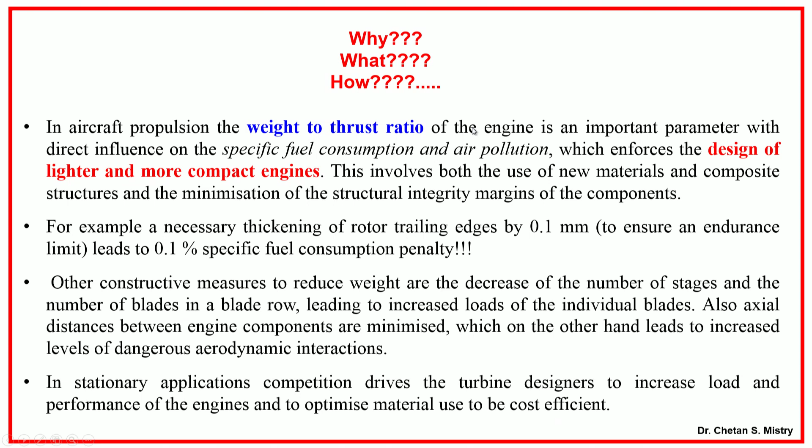When we talk about applications for land-based power plants, our major concern is specific fuel consumption, and that's the reason for the load constraints. Here we also have constraints with cost, which is why people are putting more effort towards the development of new engines.

Now the lifetime of the engine components is a major factor in terms of maintenance, operation and services. For that, cost is a major criteria. By reducing maintenance efforts, we need to stay competitive in the gas turbine engine world. Now if we look at it, we have specific designs.

It is not like the compressor or turbine we have designed for one engine can be used for another engine - it is not like that. So specifically we need to do a lot of research and development activities for developing these engines, and that's why we need a lot of experimental data along with us.

So overall, for the development and validation of numerical tools for structural and aerodynamic calculations, we are totally relying on semi-empirical relations.

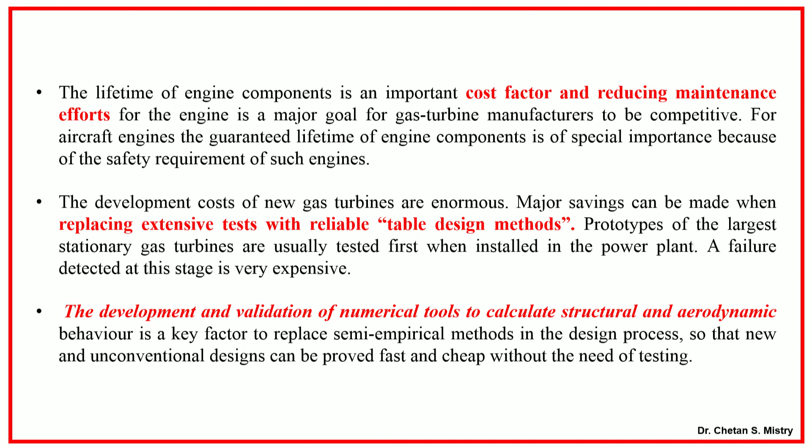Yesterday, in terms of aeroelasticity, Professor Maiti gave some highlights on that. Now the time has come where people are looking for designs that need to be done faster and at a cheaper rate, and that's what has motivated this kind of study, especially when we talk in terms of unsteady aerodynamics for turbomachinery.

Yesterday Professor Maiti discussed Collar's triangle, which comprises mainly three forces: inertia force, aerodynamic force and elastic force, and he gave some glimpse of that.

Now today, after completing this course, all participants should know the basics of the compressor that are applicable. Many of the students and participants don't have exposure to turbomachinery, and that's the reason I am starting with some fundamental parts so that they can understand easily.

Slowly we will be moving towards the complexity in terms of three-dimensional flow field. Then we will discuss operational instability in terms of stall and surge, and flow instability that happens because of inflow distortion. Overall, this will provide us a platform for understanding unsteady aerodynamics, which will be discussed in detail by Professor Watanabe from tomorrow onwards.

So if we look at the trends for compression ratio, during the 30s and 40s, the compression ratio required was in the range of 3 to 6.

Slowly that has increased, and now people started talking in terms of compression ratio of 30 to 40, and that's what is putting a lot of challenge for the designers who are designing the axial flow compressor.

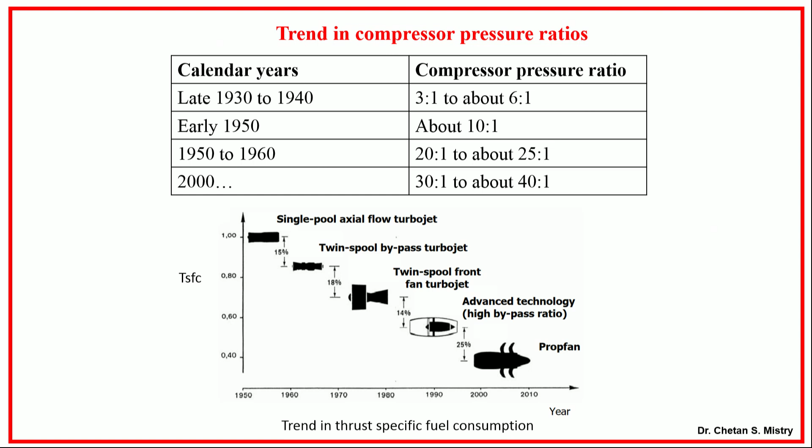Space and weight are not a criteria or constraint for our land based power plant, and that's the reason why the blading may be somewhat different. If we talk in terms of their design, that's different. In terms of manufacturing process, that's different. In terms of number of stages, those are different. So that's the reason why we need to talk overall in terms of gas turbine engines.

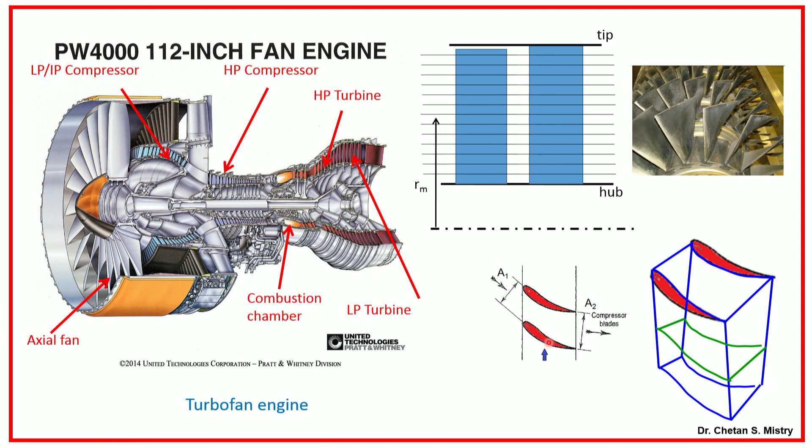Now if we look at this, this is a schematic for a multi-stage axial flow compressor. It is comprising, as I discussed, a rotor and stator combination. This rotor-stator combination, in conventional terms, is known as a stage.

Here this is known as the inlet guide vane. Now for the inlet guide vane, there are different approaches across the world. In European designs, they generally avoid having inlet guide vanes. In American designs, they prefer to have inlet guide vanes. They have different design philosophies.

Now the purpose of providing the inlet guide vane is to guide the flow towards the rotor. The purpose of the stator is to guide the flow to the next coming rotor. Now what the rotor does, as we discussed, is provide a diffusing passage. So the rotor diffuses my flow, and from there the flow comes out and strikes the stator.

That stator will guide the flow for the next rotor up to a certain aspect. I say this is applicable; later on you will realize the stator also has to do diffusion work.

Now let's try to understand a very important part when we are talking in terms of turbomachinery: the velocity triangle. The understanding of this velocity triangle is always very important. If we look here, this is my stator and this is my rotor, and this rotor is rotating from the suction side towards the pressure side.

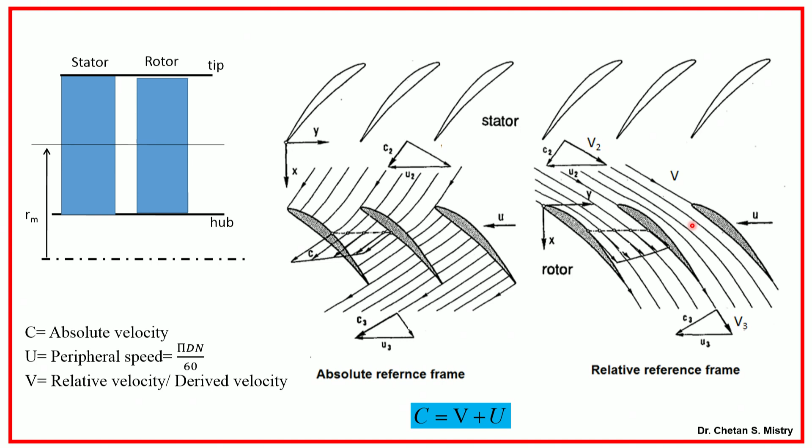Now, if we look at this blade, as I discussed, for that blade at midsection, let me put my velocity triangle. This is my velocity triangle if I consider my flow entering axially. This is my rotational speed for the rotor, and this is my relative velocity. This beta 1 is known as my blade angle.

Now, my flow coming out with relative velocity V2, with reference to my axial direction, I have my exit flow angle, that is beta 2. If I add my rotational or peripheral speed, that gives my absolute velocity component, C2. This C2 will strike my stator and come out axially. So, this is how my velocity triangle works.

This is very important when we talk about performance and understanding instability in axial flow compressors. So you need to remember this velocity triangle. If you look at the passage here, for the rotor, my inlet area is lower and my outlet area is larger. Similarly, for the stator, same is the situation.

Now, as I told, my blade is comprising of a number of aerofoils. So at each aerofoil you will have variation. Why is it having variation? Because if I define my peripheral speed as pi d n by 60, as my diameter or radius increases, my peripheral speed increases, and accordingly my blade angles will be changing, both for rotor and stator.

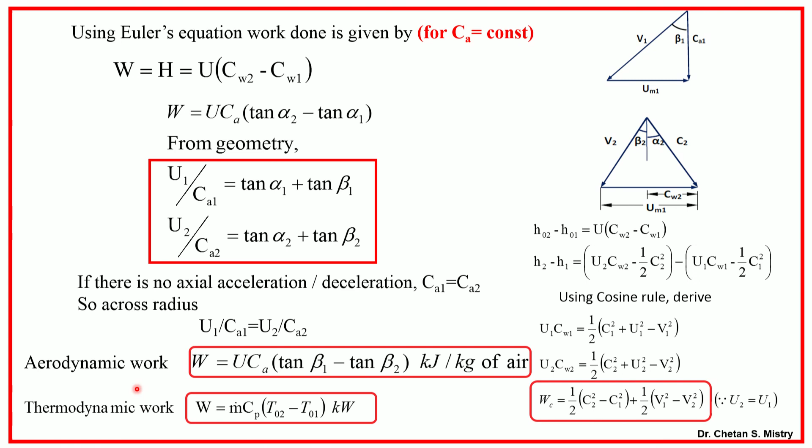Now, if I represent my work done in terms of my pressure ratio, then that is given by the pressure ratio as a function of my efficiency, my total temperature rise, and inlet temperature.

Now, the question is, as we have discussed, we are talking about recent designs where we expect our compressor, rotor, or stator stage to produce a larger amount of work. Why? We want to have a smaller number of stages, low number of stages, because we are looking for compact design. At the same time, when I decrease the number of stages, I decrease my weight of stator and rotor, meaning overall penalty in terms of drag decreases.

Now, if we want to increase this pressure rise, based on this fundamental equation, you can understand I need to increase my delta T0. This delta T0 can be increased by increasing the rotational speed U. If I increase my rotational speed, you will understand my flow will become supersonic at a particular region, and that is where I will have a problem, in terms of a structural problem.

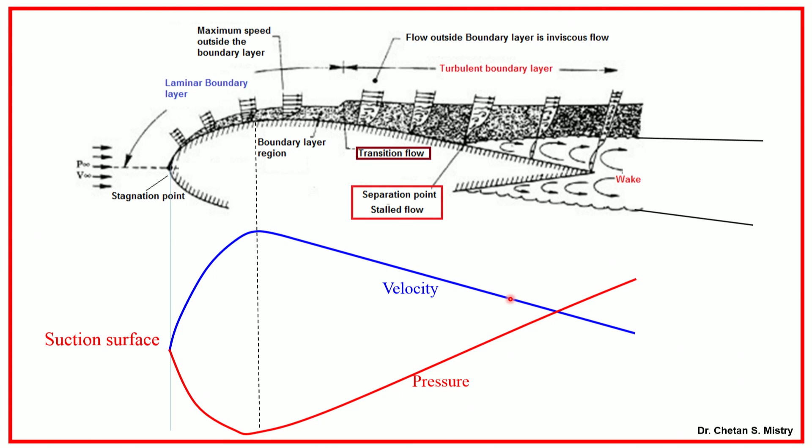This is showing the distribution of inlet pressure and outlet pressure on the blade. Later on we will discuss what is happening.

There are different types of aerofoils, as we have discussed. If we put a flat plate and give it curvature, that will also give a rise of pressure, but that pressure rise is not as per our requirement. In that case, we need to take the benefit of the aerofoil shape.

If you look at these aerofoils, they are subsonic aerofoils - we have NACA 65, and we have the C4 aerofoil, known as the British aerofoil. Most low speed application designs are made using these aerofoils. If you look at this blade, the aerofoil we are talking of is the C4 aerofoil.

Similarly, this is my next blade. If you compare these two blades, this blade is thicker and this blade is thinner. Very soon you will understand the reason behind it. This blade is a transonic blade.

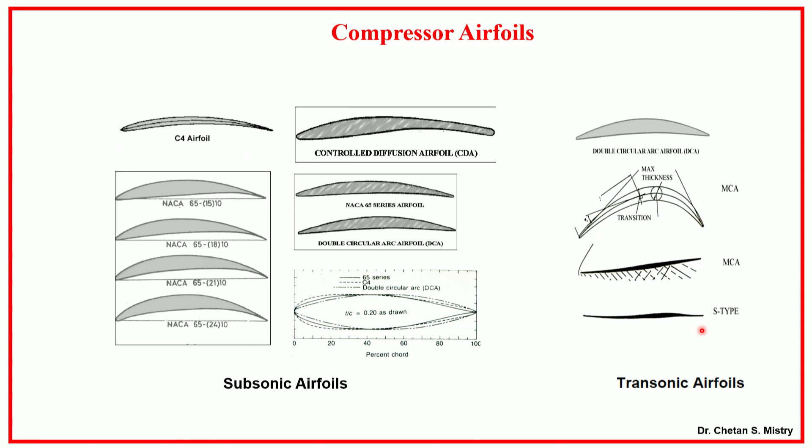For the transonic blade, this is my case here. This has been specially made, known as double circular arc, multiple circular arc, and maybe S type blade. So over the years, as per requirement, people have modified the shape and are using this kind of aerofoil for transonic rotors.

Now let us try to understand - once you understand this part, half the work is done in terms of understanding your compressor. If you look at my flow, it is entering from the upside. Here I have my leading edge, this is my trailing edge. As discussed, the lower part is known as the pressure surface, and the upper part is known as the suction surface.

Now what happens when my flow is entering - this is represented in terms of velocity, with acceleration of flow, and then because of the curvature of the blade, the flow gets decelerated smoothly. Similarly, near the pressure surface, in a small region I get acceleration of flow, and then the flow gets decelerated - this is how the velocity distribution will be. Conventionally, for turbomachinery, people define their performance in terms of Cp.

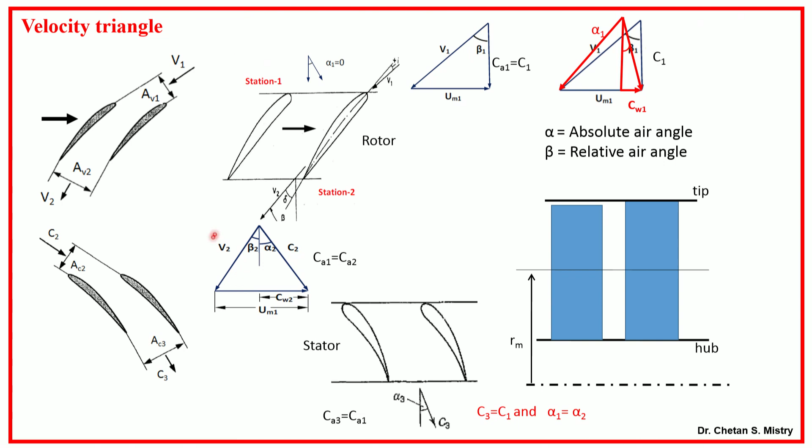What they say is they have the maximum acceleration possible, defined as V maximum. My inlet velocity is V1 and my outlet velocity is V2. Let me discuss this in terms of my velocity triangle. Here, this is my inlet velocity and this is my outlet velocity - I am talking about the relative velocity. If you look carefully, their magnitudes are different. At the exit, my relative velocity will be lower.

Now this diffusion factor incorporates solidity, which is known as chord by pitch. Pitch in the sense of the distance between two successive blades. So here, between this point and this point, that is what we are defining as pitch, which depends on my number of blades. You can look at 2 pi r by z, and secondly that is what we are talking about in terms of chord.

Now the situation is, as I told you, I need to have higher diffusion, so you need to play with these parameters. Suppose if my hub diameter is smaller and my tip diameter is larger, if I want to accommodate my blade, I can have less number of blades to accommodate. Why? Because my hub has a constraint - I cannot accommodate more blades. Now, suppose my hub diameter is comparatively larger, what will happen? I need to have more number of blades. So you observe a similar situation in the engine.

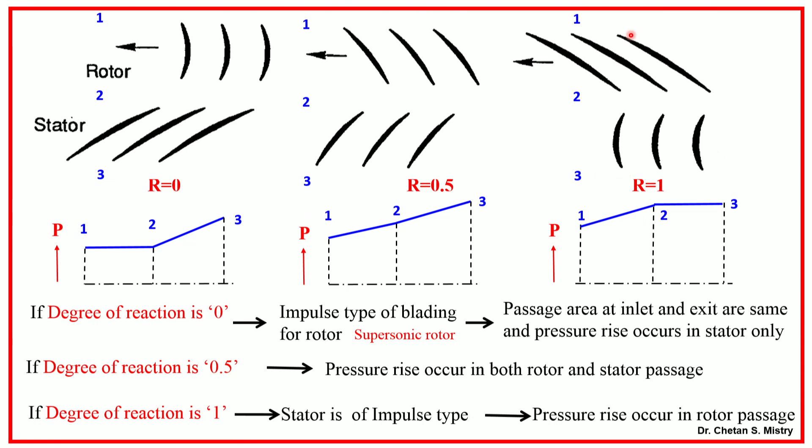Here your delta beta, and if you look at this as an overall one blade, that delta beta is different. Now if you look at this, this is a blade - that is your tandem configuration.

What is happening - if you look at this as a single blade, this is single, here this is my single blade, this is also single blade, but the thing is we are having tandem configuration. What it means is, if you look at the curvature of my blade, that is larger, and that is required to achieve more pressure rise.

Now the reason this is interesting is in terms of having configuration for more pressure rise. What concept people talk about in this tandem configuration is, suppose if I have a larger curvature, there are more chances for my flow to get separated from the suction surface. Since we are having an additional blade placed below this...

What exactly it is doing - because of the gap between these two blades, my flow will get energy from this particular region. This leading edge is accelerating my flow, giving more momentum to my flow, and that is how I can delay my flow separation on my blade.

By doing so, now what is happening - I need to enter my flow to the next stage in axial direction, so I will be having my stator configuration of impulse type. And here, this much amount of length we can save. Roughly people talk in terms of 30% reduction in the length of my engine.

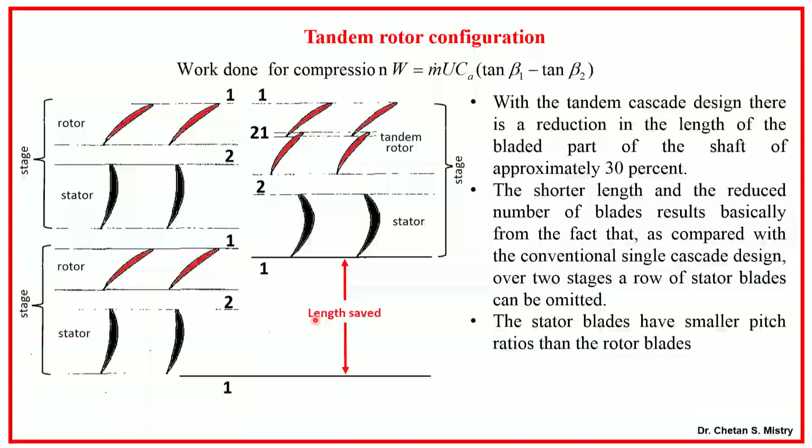Now when we say 30% reduction in length, that means it's the length of my stage and the length of my shaft on which I will be putting my rotor. So if we look at that shaft, suppose it is a solid shaft, considerable amount of weight can be reduced by incorporating this. So here we are having the reduction - overall reduction in weight as well as overall reduction in size.

Now near the tip region, we know we need to provide a certain amount of clearance between the casing and the rotor. When we provide this clearance, what happens? My flow always has a tendency to move from the high pressure side to the low pressure side. So this is how my flow jumps.

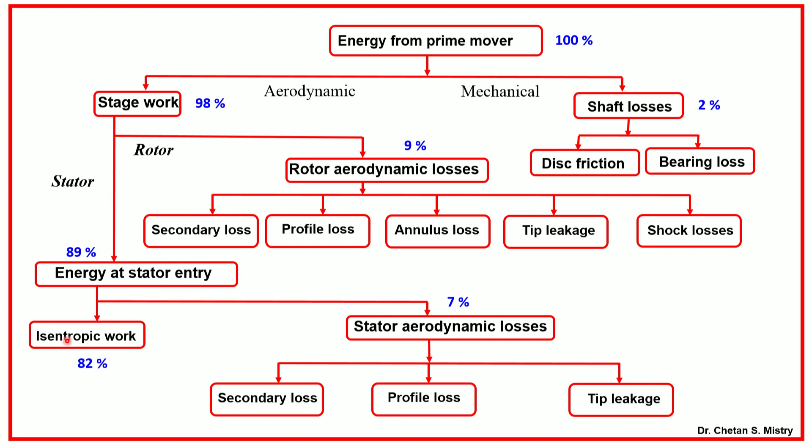Now this is what we will be discussing in detail, various losses, because that is what is creating trouble in terms of flow unsteadiness. Once you understand these fundamentals, it will give you very good understanding in terms of unsteadiness, that is what is being caused in my compressor.

It includes end wall losses, profile losses, tip clearance loss, secondary loss, shock loss, and shock boundary layer interaction. When we talk about boundary layer, we know we are working under adverse pressure gradient, so my flow will not have the energy to sustain or stay along the blade surface. After some point, it will lose momentum and you will have separation of the flow. Similarly, in terms of solid body, we will have growth of boundary layer.

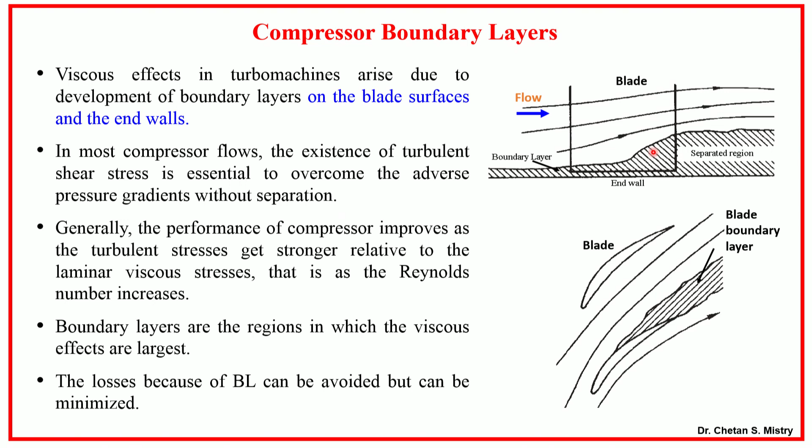This is what is creating trouble in terms of my flow physics. Later on, this boundary layer loss will merge with my other losses, and that is what is creating more trouble.

Suppose you consider the cambered case. When I say my angle, that is a constraint. My delta beta, that is my blade turning angle, is in the range of about 30 to 40, 45 degrees. If it is larger than that, you have chances for flow separation.

If you look here, this represents my low cambered aerofoil and this represents my high cambered aerofoil. If I have a high cambered aerofoil, I will have a thicker aerofoil, which will be subjected to higher losses.

In this region we will be having a thicker wake coming out. If I am talking in terms of low cambered and thin aerofoil, you will have lower losses, but at the same time the working capacity or pressurizing capacity is lower.

This again depends on so many flow parameters, like Reynolds number, Mach number, longitudinal curvature of my blade, inflow turbulence, free stream unsteadiness, unsteady boundary layer, pressure gradient, shock strength - so many flow parameters that are changing my flow behavior over the suction surface.

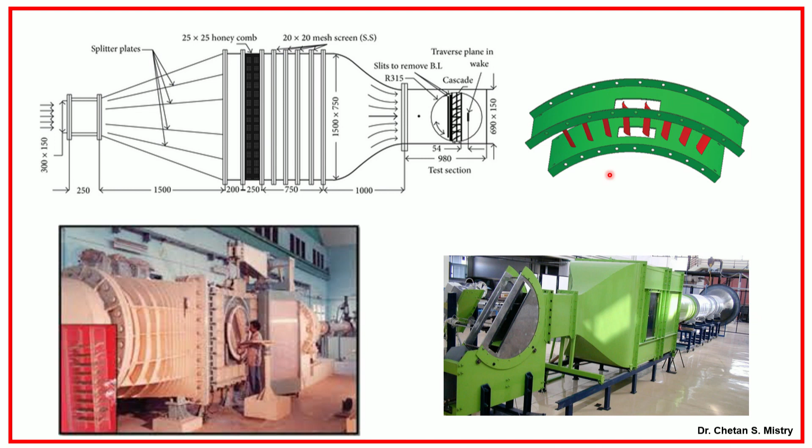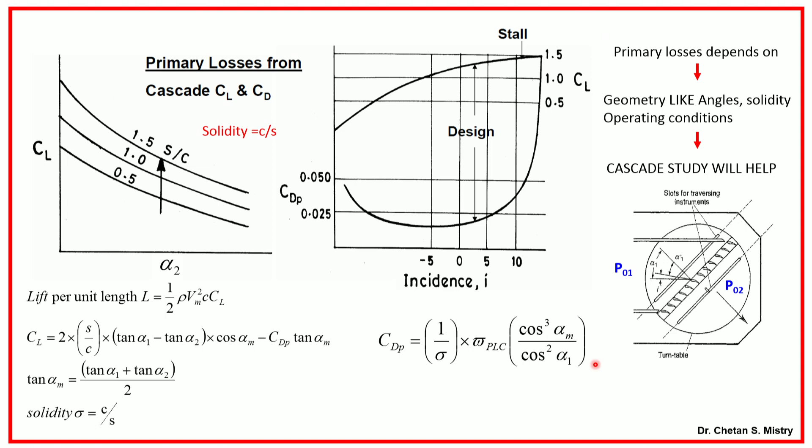Now the situation is what we are talking in terms of mixing losses. The name itself says it is because of mixing of my wake flow with downstream or freestream flow. That is what is happening between the gap of rotor and stator. That means the whole physics depends on what needs to be the axial gap between rotor and stator. Let me explain what will happen.

Suppose if I put my axial spacing to be larger, the size of the stage or overall stage length of my compressor will be increasing. Now when I am decreasing my axial spacing, I can reduce the size or length of my compressor stage. But since we are having less spacing between rotor and stator, flow unsteadiness or flow three-dimensionality will be greater in that particular region, and that will lead to losses and unsteadiness in the flow.

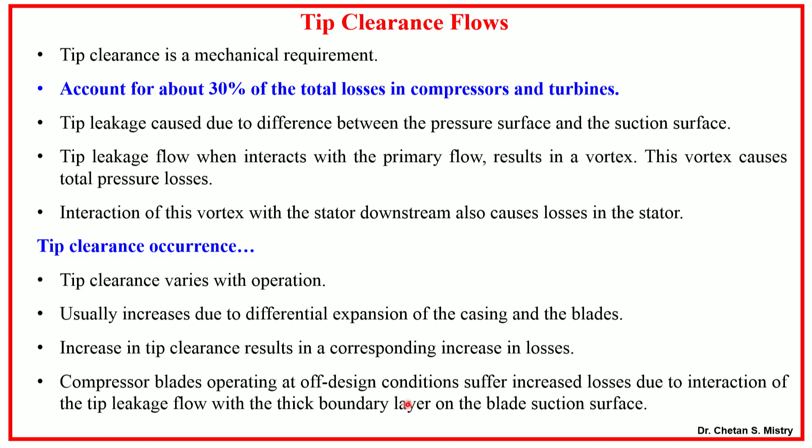Now the situation is, when it is working under off-design condition, I will be having more interaction with thick boundary layer condition, and that is changing my performance. Now let us try to understand this situation.

Here, this is my incoming flow that is entering. Now we will be having my flow moving from the pressure side to the suction side. What it will do when moving from pressure side to suction side is deflect my main flow. That means in this particular region we are having a low velocity region or flow deficit region. That is acting like my flow blockage.

Now here, this particular region is acting like a flow blockage. In that region we have seen our axial velocity seems to be lower. Now what is happening? The interaction between stator and rotor near the tip region, because of this flow blockage, the flow that needs to go towards my stator will not go. That means my stator will be working under off-design condition. Or I need to design my stator in such a way that it will take care of this.

Now this is what has been defined by Professor Tan from MIT. What they say is how my tip leakage flow is behaving. We have discussed there is a flow moving from pressure side to suction side, merging with my incoming flow, crossing through this passage, and striking on my pressure surface of the next coming blade.

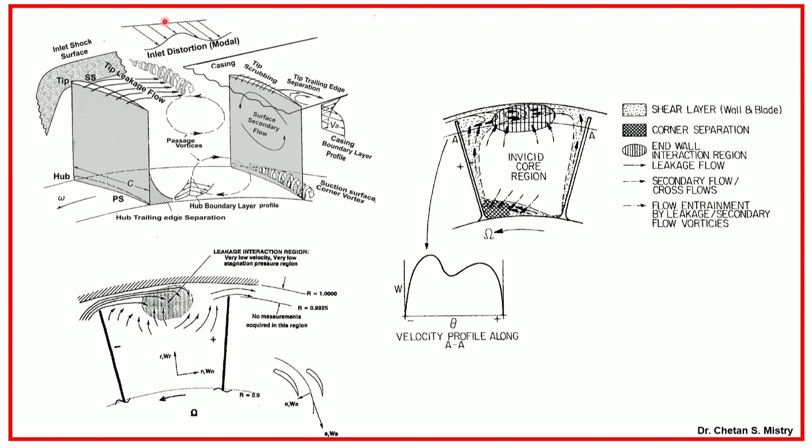This is what we call inlet distortion, which we will discuss when I talk about flow instabilities.

Now, this is what I was talking about in terms of changing your tip clearance. This is my design condition, with a certain amount of tip clearance. Now, because of some reason, manufacturing difficulty, tolerance in rotor design, or fabrication error, in some region some of the blades will have radial movement like this.

What will it do? It will touch my casing. Similarly, maybe because of manufacturing error or movement, the gap will increase. Now, when we talk about flow instability, flutter, unsteadiness, this gap plays an important role. You will have catastrophic failure of the whole compressor, or complete damage to the engine. So this is one of the reasons why people emphasize having a thorough understanding of flow physics.

Now, this is what we are talking about in terms of secondary flow. As I discussed, suppose I am looking from the trailing edge side. This is my pressure side and suction side. We will have the jump of flow from pressure side to suction side.

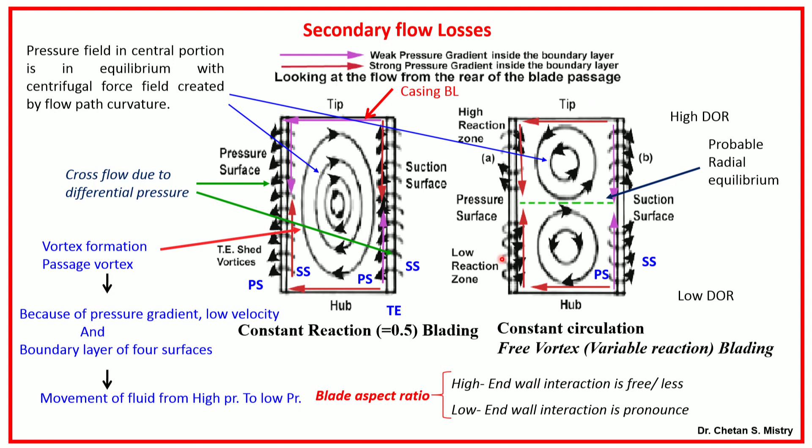Now let us move towards the Mach number and the shock losses. What we have understood is that my static pressure rise in the compressor will be increasing with increase in Mach number. My pressure gradient will be increasing with the Mach number. Similarly, we will be having momentum thickness, that is what is growing with the Mach number.

Let us try to understand. Suppose this is the flow between my flow passage between 2 blades. If you look at this, this is my performance map at different points. Say this end, that is my design point; A point, that is my stall point, I will discuss very soon; B and C point, those are my operating points.

So if you look at here, when I am talking in terms of point A, what is my point A? That is my stall point. Now let us try to understand. Earlier, during the 60s and 70s, when people were doing design, they found that with increasing rotational speed, my flow was becoming transonic. And that is the reason why they used to say avoid that kind of situation.

Slowly people have understood, rather than taking that as a loss, let us try to understand it another way. Suppose if I am talking here, this is my shock that will be attached to my blade, and the other end of my shock will be striking on the suction surface of my next coming blade. That is what is acting like a normal shock. The property of my normal shock is to give the pressure rise.

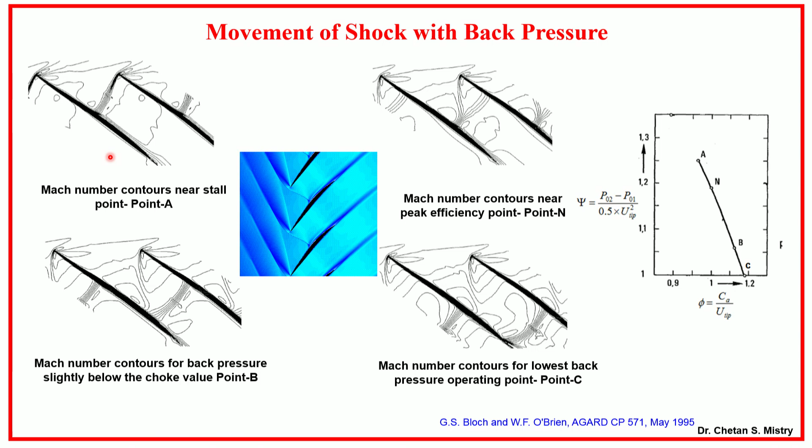So if you look here in terms of aerofoil, that is not the conventional aerofoil we are talking of. They are of some special shape. Suppose if I am talking in terms of point N, the shock is moving downside. Similarly, if I am talking in terms of B, that is moving downside. So the thing is, maximum pressure rise, maximum diffusion you are getting when you are at point A, and that is this situation. So you are taking the benefit of your normal shock.

Now the thing is, this is what we have discussed in terms of three dimensionality. Now let me discuss in terms of your inlet shock, that is what is entering inside my flow. Now what is our understanding? That shock will be acting like a blockage of my flow, and downside of my shock, I will be having a steep pressure rise. Now when I will be having very high pressure rise, and that too in a diverging passage, then there are more chances for my flow to get separated.

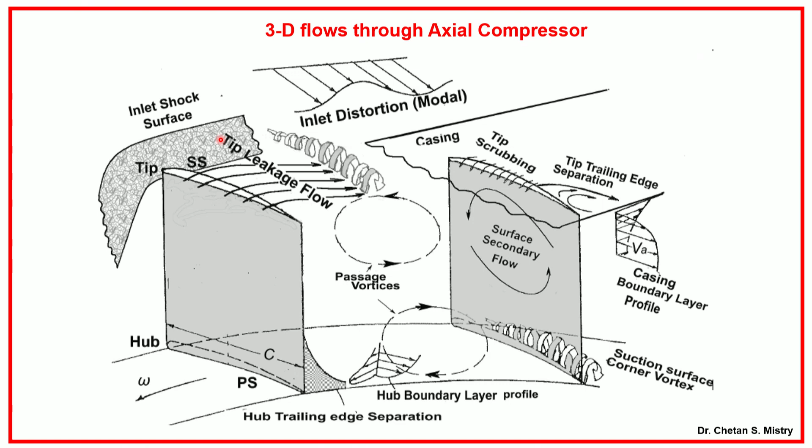So in terms of turbomachinery, the most complex fluid flow is encountered. What are they? They are basically secondary flow because of viscous effect and complex geometry, which is dominated by passage vortex, corner vortex, trailing vortex, horseshoe vortex, scraping vortex, etc. The inherent unsteadiness is because of relative motion between your rotor and stator.

Now, the flow pattern near the wall region, we will be discussing soon, that is in terms of laminar flow, turbulent flow and transition flow. Your flow may be subsonic, supersonic, or transonic, and due to the limitation of space, if we are talking in terms of military engines, space and weight both are constraints. So I cannot put a larger space between rotor and stator. There you will be having a very small gap between rotor and stator, and that is what is creating the whole trouble in terms of my flow unsteadiness.

Now let's try to understand in terms of incidence angle. Suppose this is my situation, this is my velocity triangle. This will create the platform for the next stage. Let's understand this is my design condition for a particular aerofoil.

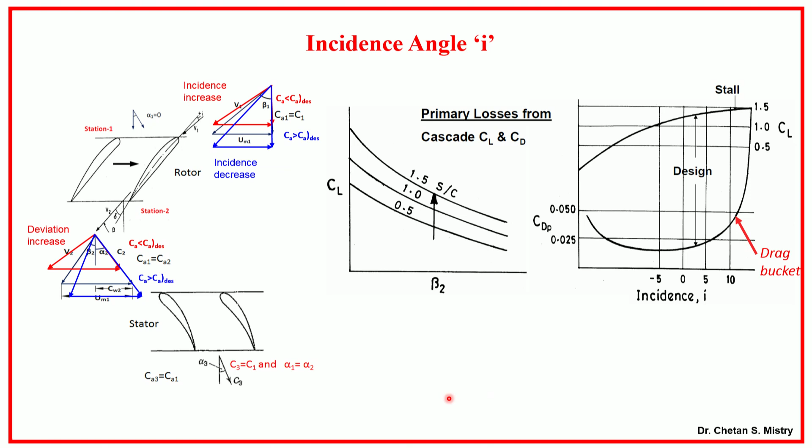Now let's understand in another sense, as we discussed the Cp distribution, which is very important for us. This is my design incidence condition. I will have a distribution of pressure or distribution of Mach number, here defined in terms of Mach number. Upper surface represents my suction surface, lower surface represents my pressure surface.

Suppose my incidence angle is greater than my design condition of zero. Here, I will have very high acceleration of flow followed by deceleration of flow. At the same time, on my pressure surface, I will have small acceleration of flow and then deceleration. If you compare the Cp here, it is clear we get higher Cp.

Now if we consider the other case, where my incidence angle is less than zero, what happens? I will have crossing of flow, meaning acceleration of flow on both the suction side and the pressure side. This in turn decreases my pressurizing capacity.

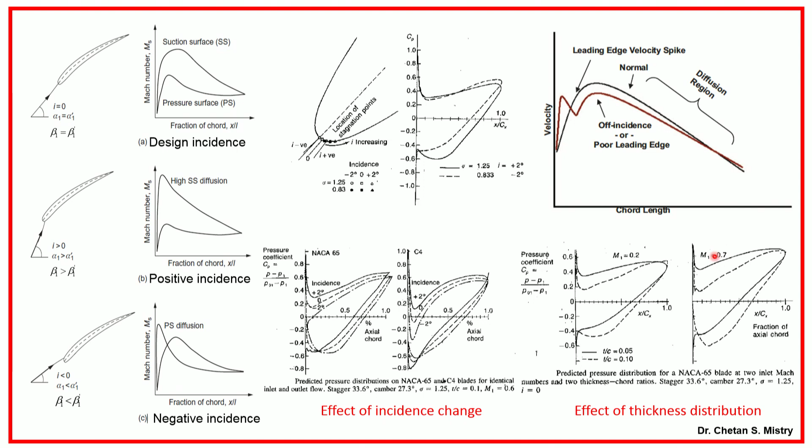For both cases, when I am changing the inlet Mach number to be larger, I will be having a larger Cp. So this is what we have discussed.

Now the question will come: sir, how do we decide the number of blades? Conventionally over the years, people have defined that you need an even number of stators and a prime number of rotor blades, that was the logic, and if you open old engines, that is the kind of configuration they have. Now people have understood the importance of selection of number of blades. If you look at high bypass ratio fans, they are selecting an even number of blades. The reason is it is easy to replace the blade, and the balancing effort needed also reduces.

Now, the flow unsteadiness we are talking of is also happening because of the selection of the number of blades. So that is also one of the criteria, or one of the reasons, why selection of the number of blades is very important when we talk in terms of flow unsteadiness.

Now let us talk in terms of one more angle, what we define as deviation angle. What happens at the inlet, the angle we define as incidence angle. At the outlet, we define that as deviation angle. Because of adverse pressure gradient across the aerofoil, inlet and outlet, the flow gets separated, or you will have low momentum fluid both from suction side and pressure side coming out.

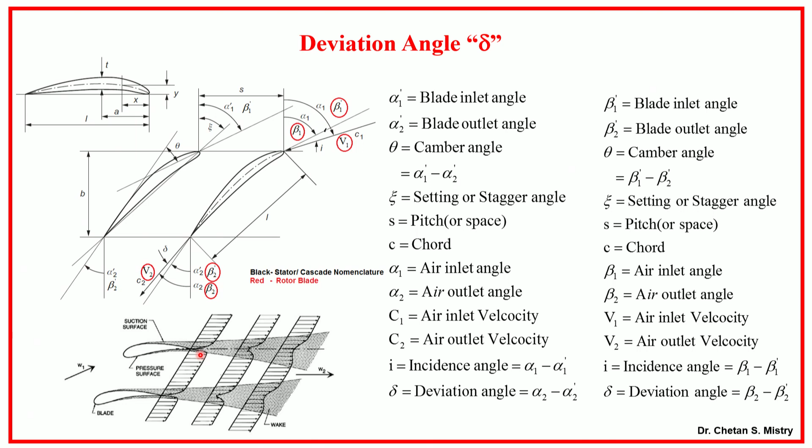And when it comes out, it acts like a negative jet. So when doing design, designers purposefully accommodate that deviation angle in the calculation, so that this kind of situation does not occur, or it takes care of the flow separation situation. This deviation angle has been calculated by a rule known as the Carter rule. Nowadays with numerical and computational tools, people are moving to CFD analysis, and based on the flow physics across the surface, they decide the deviation angle.

One more angle we have defined is the stagger angle. This stagger angle is between the axial direction and the chord, this is known as the stagger angle. Now if you try to understand, this is the normal operating condition. What I will do is stagger, or increase this angle, or decrease this angle. Suppose I am decreasing this angle, what will happen?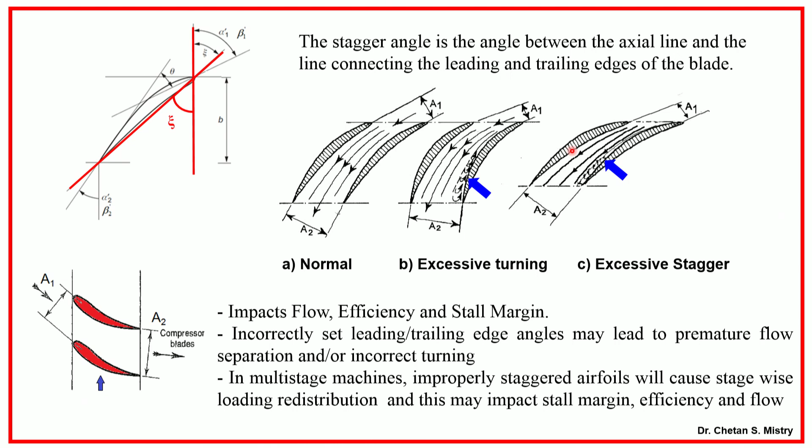I will have flow turning, which will lead to flow separation. Suppose if I am increasing my stagger angle, what will happen? I will have separation of flow happening on the suction surface, and that is the reason why I will not achieve the diffusion I am expecting. So that is why, in order to accommodate the mass flow rate, or control the mass flow rate flowing through the passage, it is controlled by the stagger angle.

Now what we say in terms of maximum camber: if you look at distance A, that is known as the location for maximum camber. Here we are having a circular arc camber line, and this is the Cp distribution for that. If I am shifting my maximum camber towards the leading edge, then the Cp distribution changes, that is known as a fore loaded kind of blade. If I am changing the maximum camber towards the rear side or trailing edge side, that is known as aft loading.

So, you can clearly visualize this loading.

There are different kinds of camber lines people have defined: circular camber line, parabolic camber line, polynomial camber line, exponential camber line, multiple circular arc, double circular arc. As per the design requirement, people are adopting camber lines. Mainly circular and parabolic are used for subsonic compressor design. When we talk in terms of transonic, we use polynomial, exponential, or double circular arc, or multiple circular arc.

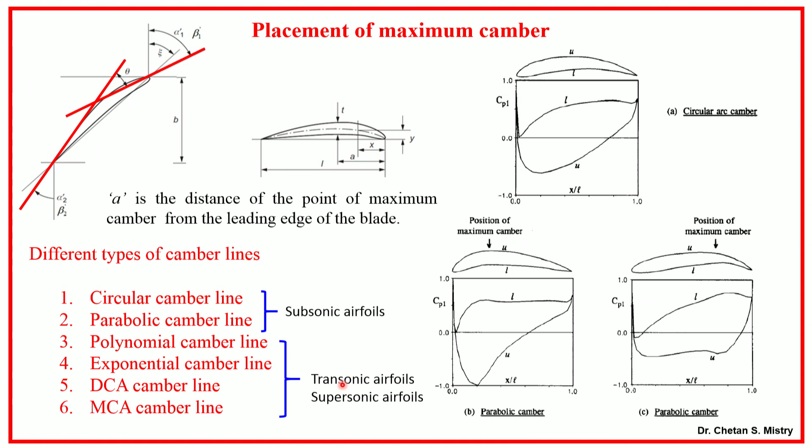Now, when we talk in terms of transonic rotor, let us try to understand why we need to understand it. What we observe is that my radius changes from hub to tip region. With change in my radius, my peripheral speed changes. When my peripheral speed changes, my relative velocity with which flow is entering changes. That means my relative Mach number is increasing.

So what will happen? Near the hub, you will have low relative velocity; near the tip, you will have high relative velocity. So near the hub, let me show you, half the blade acts in the subsonic region, while near the tip region it acts like a supersonic region. Now, as we've discussed, what happens in the supersonic or transonic region is this bow shock entering inside my compressor.

Since this has curvature, it is subjected to expansion waves. These expansion waves increase my velocity. At the same time, the other end of my bow shock strikes my suction surface. This acts like a nearly normal shock, giving rise in pressure. So upstream of my normal shock I have low pressure, downstream I have high pressure, and within this passage I have very high pressure, and I expect the outlet pressure to be large.

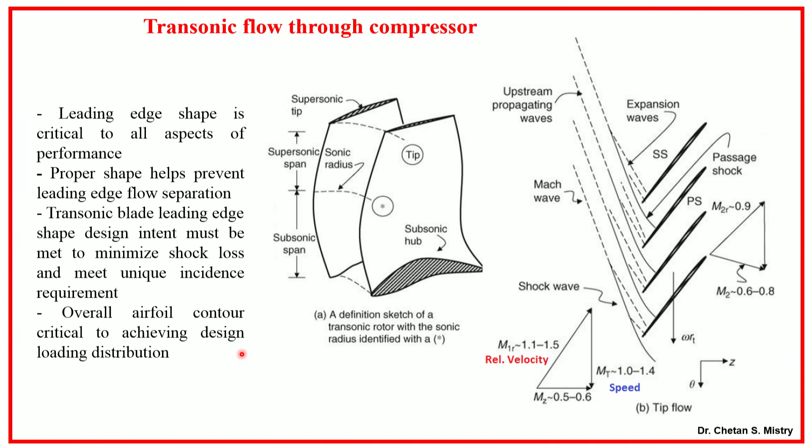Now in terms of supersonic and subsonic, as I have discussed, there are different configurations which are possible. As we move towards increasing pressurization requirements, nowadays almost all your rotors - what we talk in terms of your LP rotors - are of transonic nature.

Let us try to understand the transonic definition. What we say is in terms of my Mach number - that Mach number decides whether my flow is subsonic, transonic or supersonic. As we move towards the downside or rear stages, my temperature increases. So when my temperature increases, my Mach number will not be transonic, it will be lower. So in your HP compressor, you will have flow that is high subsonic.

So for the front stages, like the fan or LP compressor, most stages have this kind of blading, what we call transonic blading. Suppose I am talking in terms of HP compressor - here, if you look, that has a shape similar to what we observed for subsonic aerofoils. So this is the rotor or rotor segment for the HP compressor.

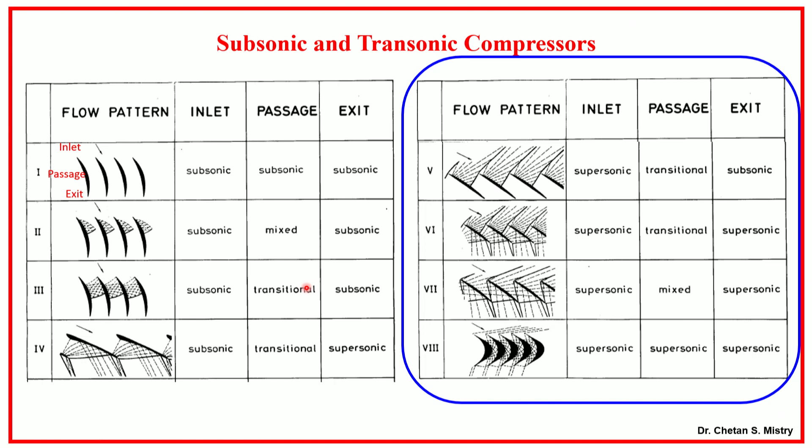Now, these are some of the configurations. You can read in detail how we are managing our flow.

Now this is what I was talking to you about in terms of expansion waves and normal shock. Here, if you look at, it is dedicatedly defined. Here I am having supersonic diffusion, that is what is happening, and downside I will be having subsonic diffusion.

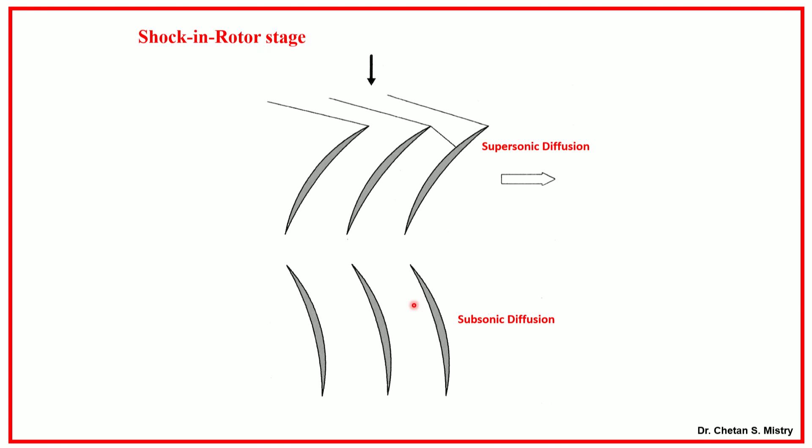People have defined it in different ways. They say shock in rotor, that is where the shock is placed, and my whole stator will be subsonic. Some designs say they will be having supersonic, with shock in rotor as well as shock in stator.

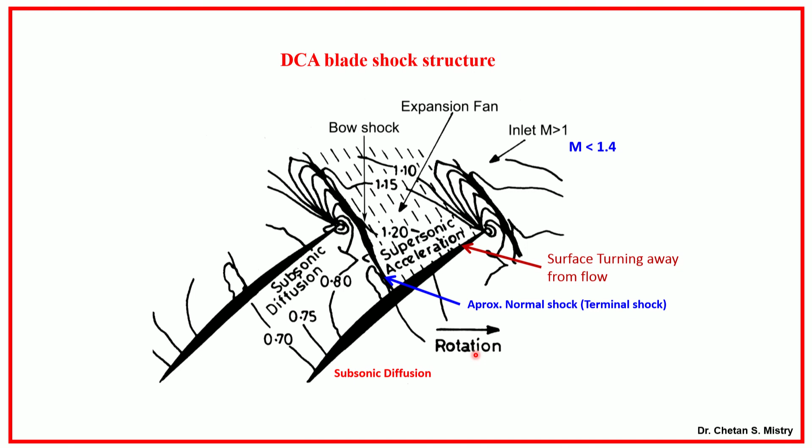Then we will be having shock in rotor, shock in stator, and these are the aerofoils what we were discussing. If you want more detail, I have given that material in which I have discussed in detail about all kinds of aerofoils.

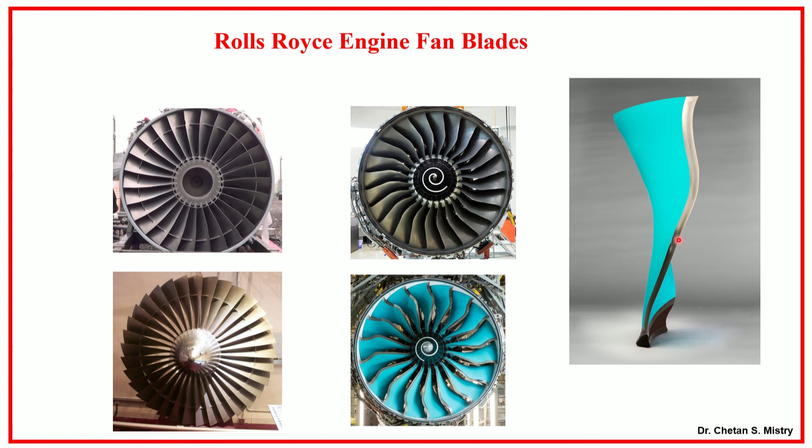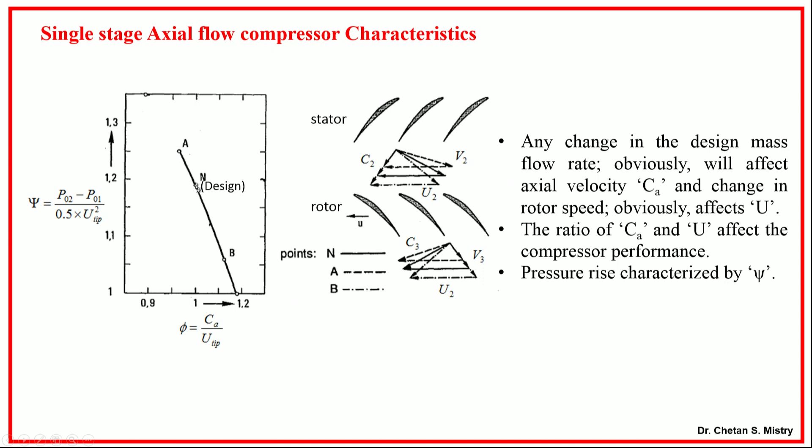Now this curve, I have my design point, this is my design point. That design point I am representing in terms of phi as well as psi. So this is the non-dimensional speed we are talking about, and non-dimensional pressure rise. So this point N, that is my design condition. You can look at, this is my solid line, that is representing my velocity triangle.

Now what is happening, suppose if I say I want to have more pressure rise, so I want to move from point N to point A. What I need to do is decrease my mass flow rate. Now this decrease in mass flow rate is represented by a decrease in my axial velocity. So here if you look at this point, the dash line, that represents my low axial velocity.

Now when I am moving towards the low pressure rise requirement or high mass flow rate side, my axial velocity is changing. Now this point A and B is not arbitrarily decided. It is based on my overall system. So you might have studied something known as losses in pipe.

For that you are calculating different kinds of losses, that's what is happening in all my components. So if I put my throttle curve, or say my curve that represents my system, it will be starting like this, and that's what is meeting my mass flow rate and pressure requirement. Similarly this line, similarly this line. We will see what exactly that is.

That is how we are having this kind of configuration. Now, if you try to understand what we say in terms of incidence angle, slowly we are moving towards our expectation for understanding the instability.

Suppose I consider this to be my positive incidence. What do I mean by positive incidence? My flow will be towards my pressure side, so I will have separation of flow happening on my suction side. Suppose if my incidence angle is negative, then my stagnation point moves towards my suction surface, and I will have separation of flow from the pressure side. So it is not the case that separation happens only on my suction surface; separation may happen on my pressure side also.

So this particular region is what people define as the surge limit. We will define this surge very soon. Now what is happening? Suppose if I am moving towards the high pressure side, or moving towards low mass flow rate side, the phenomenon we have discussed is the change in my axial velocity.

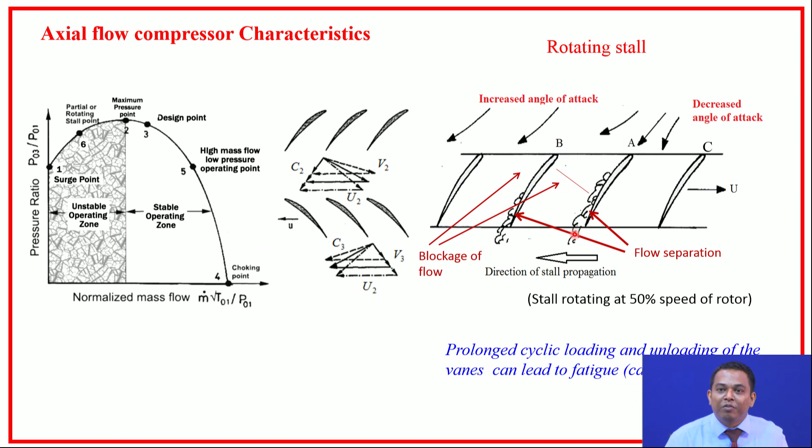Here you will be having flow separation that moves in the direction opposite to the rotor. That leads to a change in pressure distribution on the blade, meaning the blade is getting loaded and unloaded. It will generate the pressure rise as per requirement, or it will not generate the pressure rise as designed. Under that condition, the blade will be subjected to catastrophic failure. This is what Professor Watanabe will be discussing in his lectures.

For a multi-stage axial flow compressor, suppose I am designing my engine here in India, while another person is designing an engine abroad, maybe in Europe or Russia. Their operating temperature and pressure will be different. Suppose someone supplies a performance map based on their observations in Russia, and we test the same engine here in a hot environment - that is not the reason why the engine isn't giving that pressure rise. You cannot say the engine is not performing just because it was designed in a particular region. To avoid this, people have defined standard temperature and pressure conditions.

So the performance map is defined using normalized mass flow rate and normalized pressure ratio, or pressure ratio. Before going into details, let us try to understand the performance of an individual stage. This is the performance map for a multi-stage axial flow compressor engine. For this engine, they have done performance mapping for stage 1, stage 4, and stage 7.

When the compressor is rotating at low speed, since it is rotating slowly, the density will be lower, and because of that my performance point for stage 1 comes near the stall region. For stage 4, the point is near that region too, but for the last stage, the point moves towards the safer region. So for the same compressor, stage 1, stage 4, and stage 7 all perform differently - the reason is the change in density.

In the later stages, there is a rise in density, which is taken care of in terms of axial velocity, since we are plotting the same point in terms of mass flow rate. At mid speed, almost all points are near the stall point. At high speed, because of higher rotational speed, the first stage density is larger, so it moves towards the right hand side. Stage 4 is nearly in the stall region, and stage 7 moves to the left side. Overall, when rotating the engine at lower speed, stage 1 has more chances of stall; at high speed, the last stage has more chances of stall.

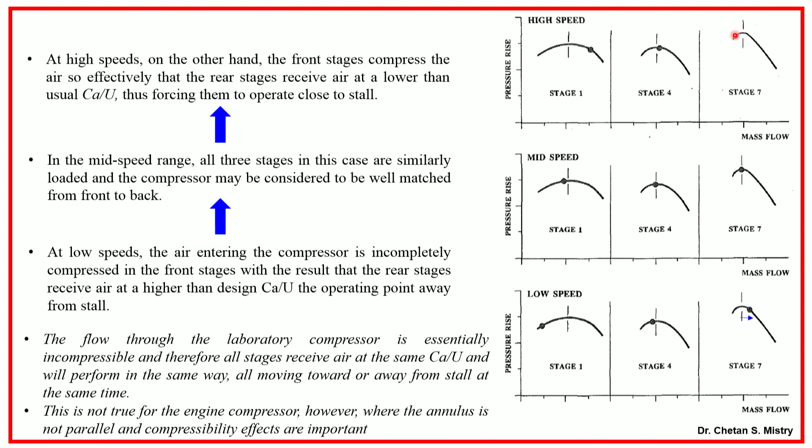Let's try to understand this in terms of the overall map. Here you can see this represents the surge line. We will see what that is.

In this case, we have a steep curve. For the low speed region, this is the safe operating range defined for all aircraft, and pilots are aware of this map. This line represents my choking line. At low speed, my density changes, and that's why my area changes, subjecting it to the choking condition. When I move towards the high speed region, my inlet gets choked, and that's why I have this vertical line.

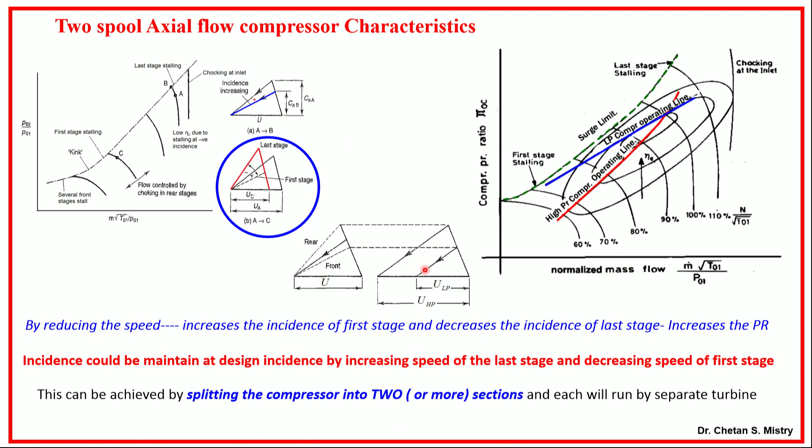Now let's talk about instability in the compressor. This compressor is an aerodynamic body having its own performance, but it's not the only factor - my upstream condition and downstream condition also affect the performance of the compressor. Let's try to understand this.

We have two types of stability: operational stability and aerodynamic stability. Operational stability is the matching of performance characteristics of the compressor with downstream components - the compressor must be matched with the combustor, the turbine, and the nozzle. Aerodynamic stability is due to steady state operation in terms of stall and surge. Aerodynamic stability depends on my inlet ducting, guide vanes, rotor, stator, and any pressure recovery device, which creates the whole system.

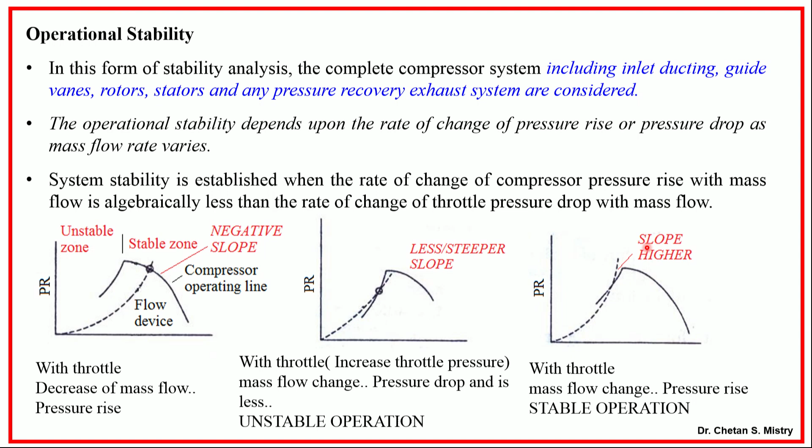Now let us try to understand the operational stability. Here, as I told, this is my throttle line for point A, throttle line for point B, throttle line for point C. What is happening? Here I am having negative slope, that means it's a stable operating range.

Now let us try to understand the stall mechanism. It's been defined in two ways: individual blade stall and rotating stall. When we talk in terms of individual blade stall, that's mainly observed when we talk in terms of linear cascade. When we talk in terms of rotating stall, that's what is happening in my rotor.

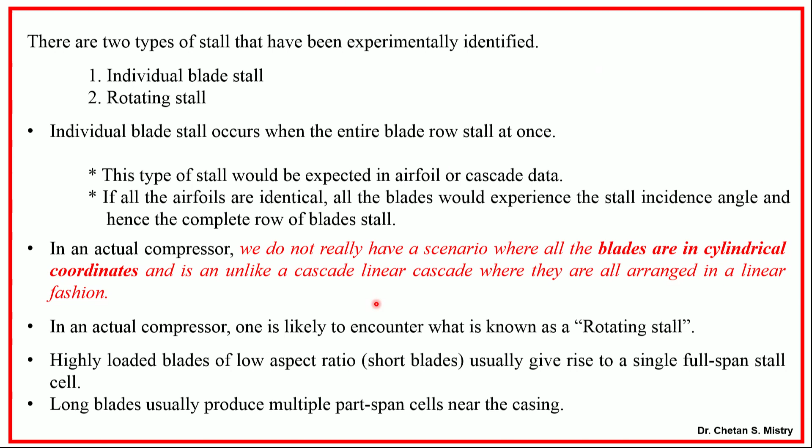With the interest of time, let us try to understand what exactly is happening. Slowly we will move towards one more phenomenon, which I have discussed as surge. We are defining two instabilities that happen in the compressor: one is defined as rotating stall, and second is known as surge.

So rotating stall is non-axisymmetric and aperiodic. When we talk in terms of surge, it is axisymmetric and periodic. We will discuss this in detail.

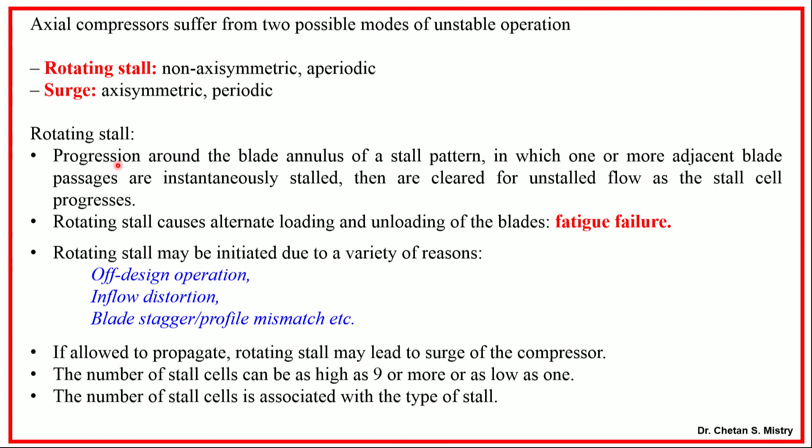Now the situation is, what is happening? Suppose this is my situation. What we have observed: suppose this is my blade, opened in one plane. Now for this region, this blade is operating in a safe region, or as per the design.

Because of some disturbance in the flow, that disturbance may be in terms of inflow distortion, it may be because of a shock present, it may be because of some change in my flow condition, or a change in the mass flow rate. What will happen is my flow is not striking exactly where we designed for, and I will be having separation of the flow.

Now that separation of flow, what will it do? It tries to move in the opposite direction. We have seen this is my direction of rotation, and in the opposite direction this is moving, and that's the reason why this is known as rotating stall. This is in line with the stall you understand in aerofoil aerodynamics.

Now what will happen? Next stage, my blade passes. So my blade 4 will be under design condition. Now blade 3 will be having a new stall that will be formed. So here if you look at, you will have these stall cells starting to form in that deep region particularly, and that's defining rotating stall.

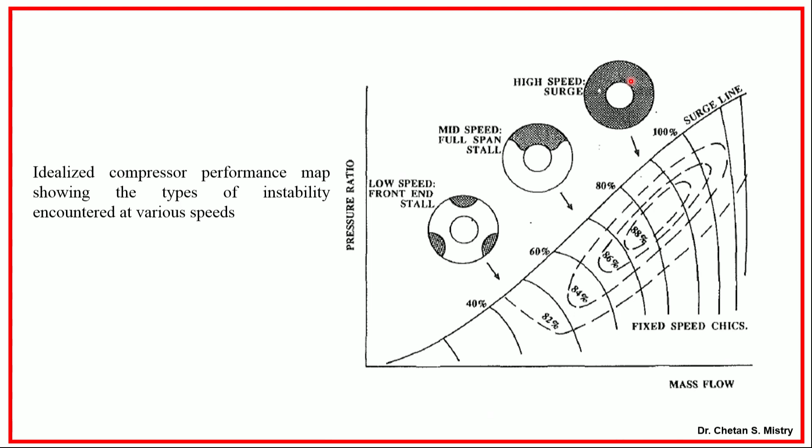Still, we are not defining surge in that sense. Let us try to understand what we define in terms of stall. People have defined it in terms of progressive stall and abrupt stall. If you look here, this is what is called the progressive way.

Now, this progressive stall is what people have observed happening because of multiple stall cells. So you need to understand rotating stall and stall cells. When we talk about abrupt or spike stall, that is a sudden droop in pressure, and that is very dangerous.

Let us try to understand exactly how this progressive stall is happening. Here, as we have discussed, we have a stall point. Now, even if I am decreasing my mass flow rate, what is happening? Rather, my pressure is getting decreased. Why? If you look at the tip region, that will get stalled. So you will have part span stall happening. What will it do? It will not allow my flow to enter as per requirement.

Further downstream, if you are decreasing your mass flow rate, this acts like a patch, a kind of blockage. Even if you keep decreasing, it may go into deep stall. So this philosophy is based on the design of the rotor.

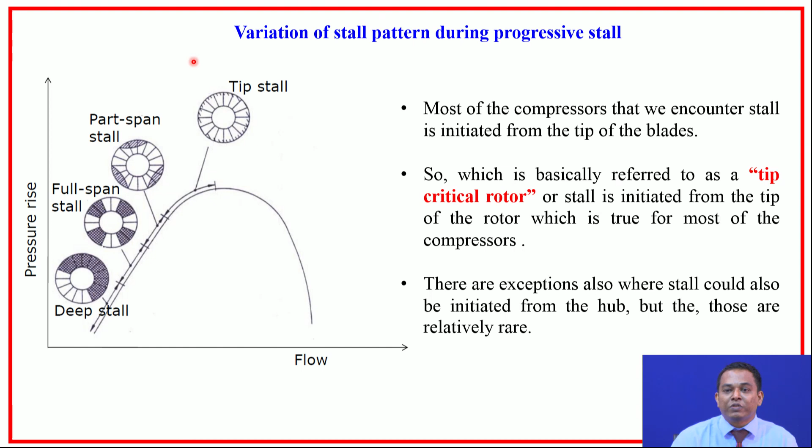Many designs we observe these days for engines are tip loaded rotors. Tip loaded rotors mean the chances for flow separation to happen near the tip will be more, so the initiation of stall will be happening from the tip. There are some rotors people have designed that are hub loaded, where flow separation happens near the hub region.

Now, how exactly is this happening? In most cases, this is subjected to a change in the differential pressure of the compressor between the intake and the combustion chamber. Why does this compressor get stalled? Let us try to understand that part.

What it says is, when you are overspeeding, you need a certain amount of time for your flow to get stabilized. Then there's engine operation outside the specific engineering parameters that have been defined. You cannot have excessive expectations, you cannot be careless when running your compressor.

Turbulence or disturbance in the flow at the intake is also creating a lot of trouble. When you are flying in an aircraft, there will be an announcement saying there's turbulence, so put on your belt, and you really feel it shake the whole aircraft. That is a critical situation. What happens is the air entering inside my compressor is other than the design condition, so the whole compressor works under off-design condition, and that gives you banging and vibrations.

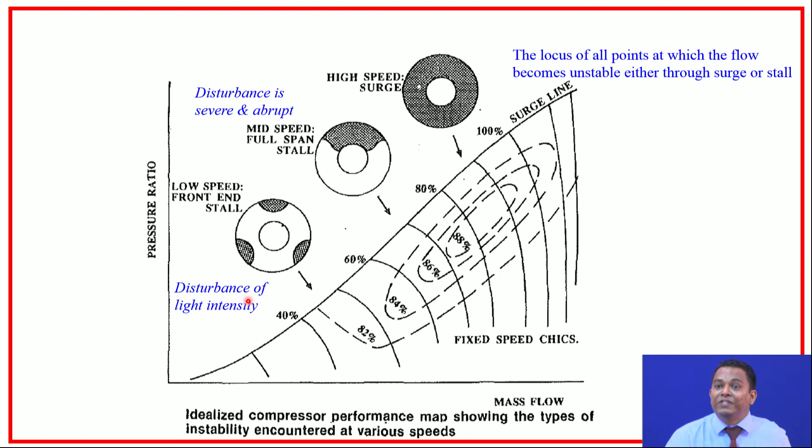Now let's try to understand this locus of points where you will be having surge or stall operation. When you are running your engine at low speed, the intensity of the disturbance is lower. When we are talking about severe and abrupt disturbances, you will be having the combined effect of the compressor and combustion system storing energy, and that's what creates the surge.

Let's try to understand what surge is. This is a performance map we have taken from the literature, based on experimental work. People have understood stall and surge, but not in great detail. So this work was reported in open literature for the Viper engine, Rolls-Royce. They ran their engine by overfueling in different tests, conducting 7 tests.

Let the engine get damaged, no problem. So at the low speed configuration, say 50%, 55%, when you are doing overfueling, you will be having some kind of flow instability. This is captured by unsteady pressure probes. So this disturbance is of lower intensity. Now when we move towards higher speed or the mid-region speed, this is the region we're looking at.

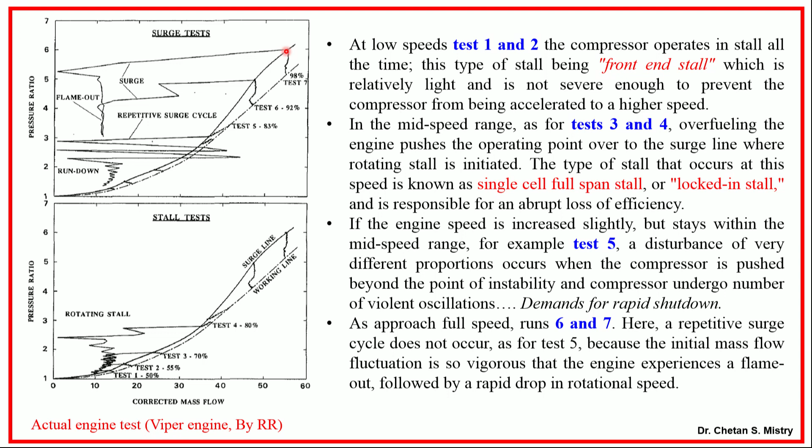So if you look here, this is represented in a nice way: when I have rotating stall, my frequency will be in the range of 50 to 100 hertz. When I talk in terms of surge, try to understand rotating stall is a circumferential phenomenon for an individual stage. When I talk in terms of surge, that is actually an axial phenomenon, so I will be having backward and forward movement. We need to understand rotating stall and surge - by the happening of rotating stall, you will be having surge. Now, Professor Greitzer has defined one parameter in terms of pressure force and inertia force.

When your pressure force is dominating, your compressor will go under surge condition. When your inertia force is larger, your compressor will go under rotating stall condition. This depends on what connecting ducts we are talking about. If the compressor is attached with a short duct, it will get stall, whereas a compressor attached with some storage device, say a combustion chamber, will surge. So when we conduct experiments in a laboratory for testing the compressor, we are mainly talking in terms of stall. So we need to understand exactly how surge and stall happen.

As we discussed, when my operating curve moves towards the left, my mass flow rate decreases, and that decreases my pressure ratio. Because of the differential pressure ratio upstream and downstream, we get reversal of flow from forward to backward direction. This leads to catastrophic failure, and you need to shut down your engine.

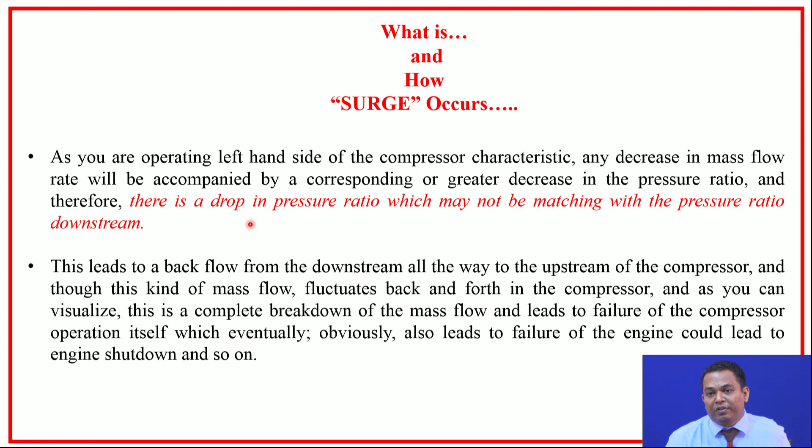Now for surge, people have defined mild surge, classical surge, modified surge and deep surge. Let us try to understand each.

If we talk in terms of mild surge, let us go back to what we were discussing in terms of the performance map. We have defined the engine operating line, and this is defined as my surge line. When the pilot is operating the compressor at a particular speed, he will always care for this, and this is defined as surge margin. For all engines, this surge margin has been defined.

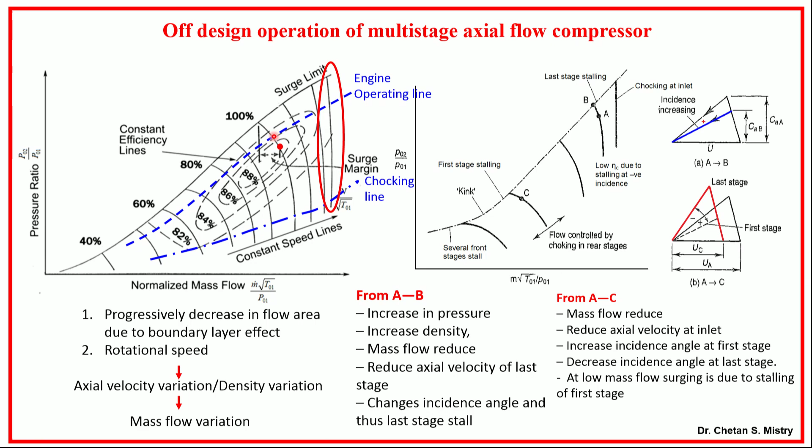When he is moving towards this point, suppose this is my operating point, and he tries to move towards a high pressure expectation, what will happen? He will get the idea of mild surge, and he will care for that, otherwise it will go into deep surge.

Then we have deep surge, where complete flow reversal happens, and this is a highly undesirable phenomenon.

People have defined surge in different ways. Some say it is the most unfortunate occurrence to befall an aero engine. It's the most serious problem in the aerodynamics of turbomachinery. Someone says it is a violent phenomenon constraining the operating range of the compressor. Others say it is something that needs to be avoided.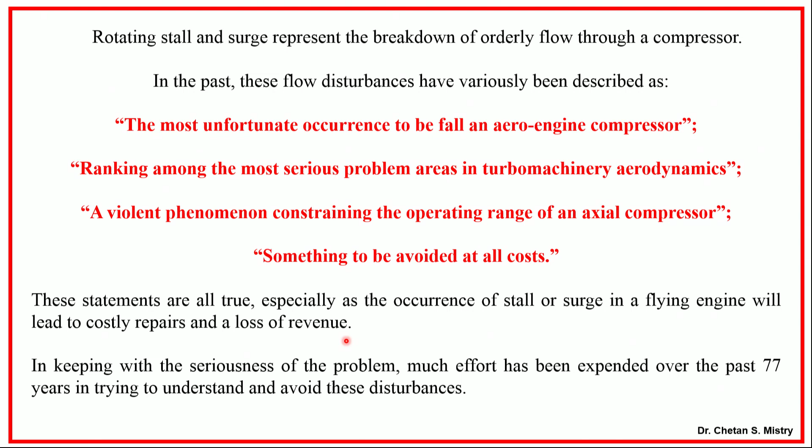Now let us try to understand flow distortion or flow instability. There are many parameters affecting the performance of the compressor, giving you rotating stall.

One situation is my inflow distortion. Suppose this is my normal operating condition, as per design my flow is entering, so I have no problem. But when I am taking off or landing, what happens? Some region of flow is not entering. Now my flow is not entering, which means that region my mass flow rate may be less or even zero.

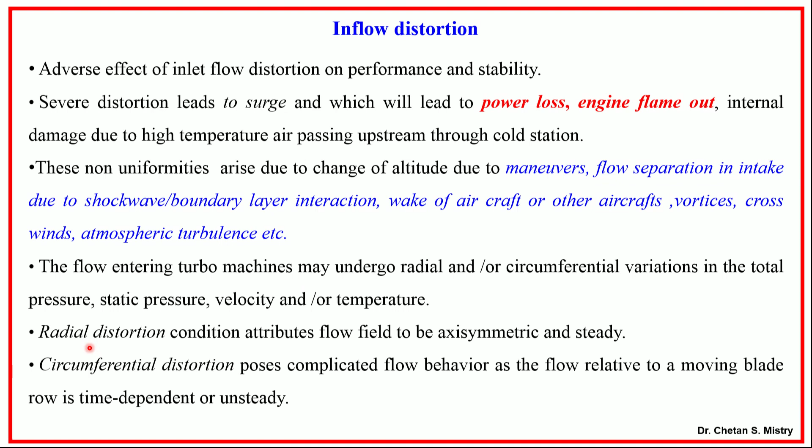When we talk in terms of circumferential distortion, your blade is subjected to distortion and it comes out, so that is a highly unsteady flow. I will show you what exactly is the meaning.

Now the classical theory - suppose this represents distortion, that is defined as a distortion screen. Let me explain. Suppose you are working in the domain of aerodynamics.

When I put my screen, I am decreasing turbulence, smoothing my flow. But when talking in terms of engine or compressor, this is a distortion generating device. So here, half of the compressor is covered with the distortion screen, and half of the region is without distorted flow.

If we look at the operating point, when I have distorted flow, I will have more pressure rise but lower mass flow rate. When talking in terms of undistorted flow, most of the mass flow rate moves in the undistorted region, giving higher mass flow rate but lower pressure. Overall, my performance will be somewhere in between.

Now the situation is, when we talk in terms of fighter planes, they need to do a lot of maneuvers, and when doing that, there may be chances that flow distortion will enter the compressor. It may subject it to rotating stall, it may subject it to surge, and that is a failure of the engine.

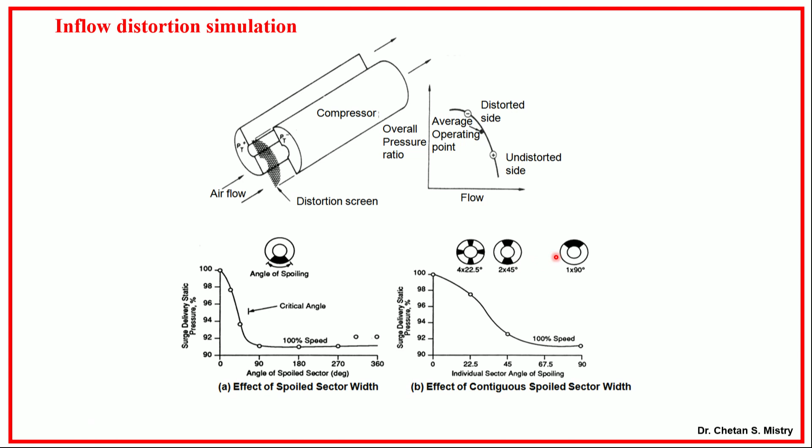This is what I have done at IIT Bombay during my PhD study. My whole study was defined in terms of the effect of distortion on a counter rotating fan stage. Because of time constraint we will not discuss this in detail, but the whole idea is to represent how the distortion study has been done.

If you look here, this is my distortion screen having a 90° sector. I have used 3 different 7-hole probes - one placed at the entry of rotor 1, one placed between the rotors, and one placed at the exit of rotor 2, to capture total pressure, velocity, flow angle, and different parameters.

Other studies I extended with radial inflow distortion - the hub region covered with the distortion screen, the tip region covered with the distortion screen, then the combination of low porosity index and high porosity index, which gives complex flow physics. So this is my experimental setup.

Now, in order to study what is happening throughout my passage - at the inlet, at the exit of rotor 1, at the exit of rotor 2 - I kept my probe in the same position, and I rotated my distortion screen in intervals of 15°.

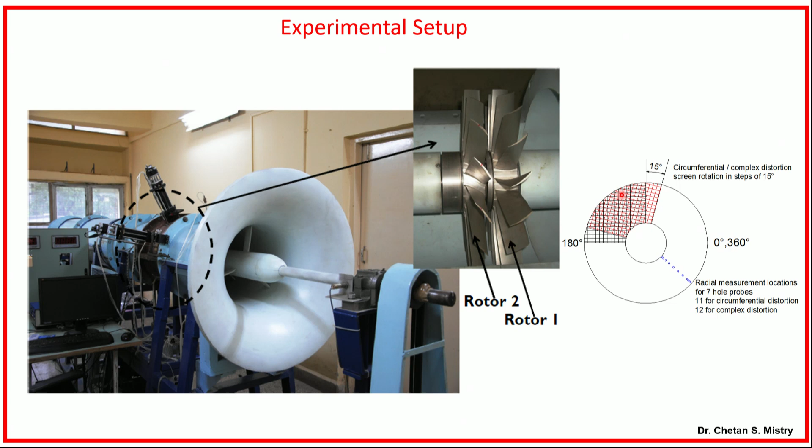Now this is my total pressure contours at the inlet, at the exit of rotor 1, and at the exit of rotor 2. Since I have kept my distortion screen at a 90° sector, this is the flow physics I am capturing. The purpose here is not just to explain what is happening, but the whole purpose of the study is: though I am giving distortion at the inlet, at the exit of rotor 2, I am getting clean flow. So that's the requirement - suppose you have distortion upstream, downstream you will not have any distortion. This kind of logic people started using.

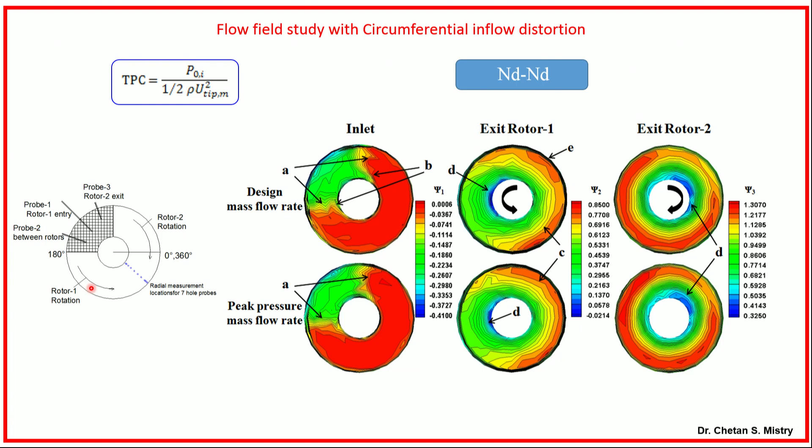But here you need to understand what is happening. If you look, this is the rotational direction of rotor 1. Suppose I have one blade approaching towards the distortion screen - my mass flow rate will be decreasing, so it will be acting at a low incidence angle, or my incidence angle is changed. Now when it comes out from the distortion, my incidence angle will be increasing because my mass flow rate is changing. This is what is being represented in that sense.

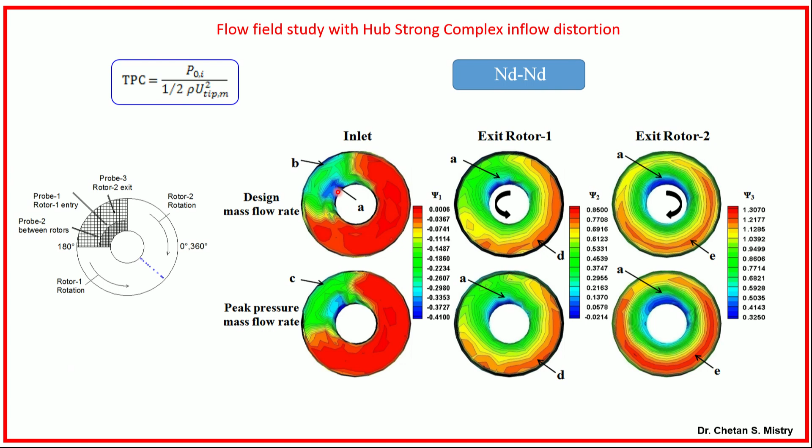Then with hub strong complex distortion, my performance further decreases. This is the situation when I am talking in terms of my hub region, which is having a low porosity region. Similarly, this is with the tip. Now the situation is, as I told, inflow distortion is creating whole trouble. When we talk in terms of the design of the engine, during design we are not taking care of this distortion, and when we fit that with the aircraft, it is subjected to distortion. That's the reason why people now started thinking in terms of having detailed understanding of inflow distortion at the time of design.

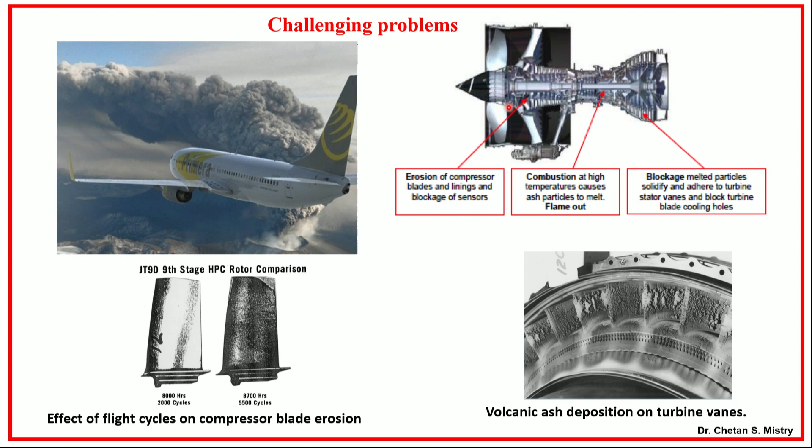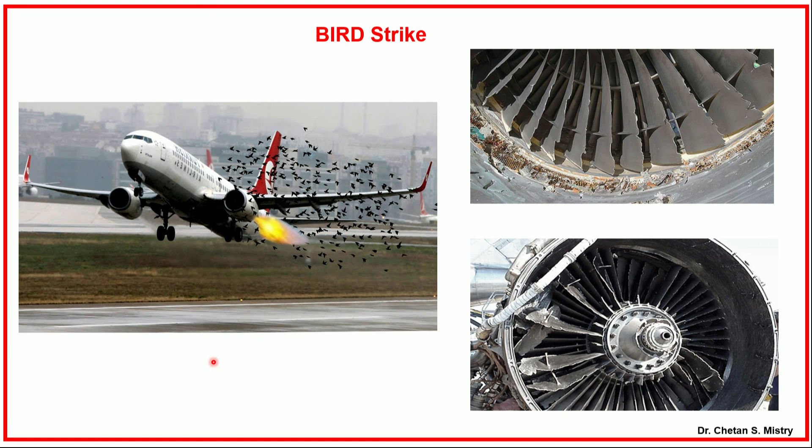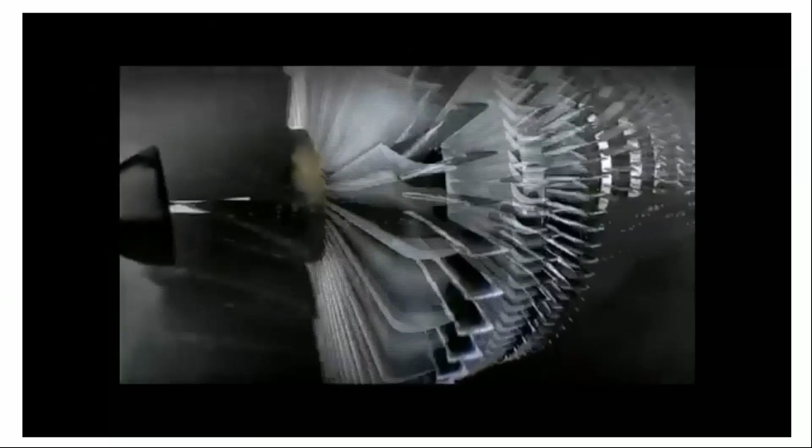People started talking in terms of high bypass ratio engines. In commercial engines, what is happening? You increase the bypass ratio. Now with increasing bypass ratio at certain altitude, you get ingestion of ice particles. Those ice particles start sticking up in this particular region, say at the stator.

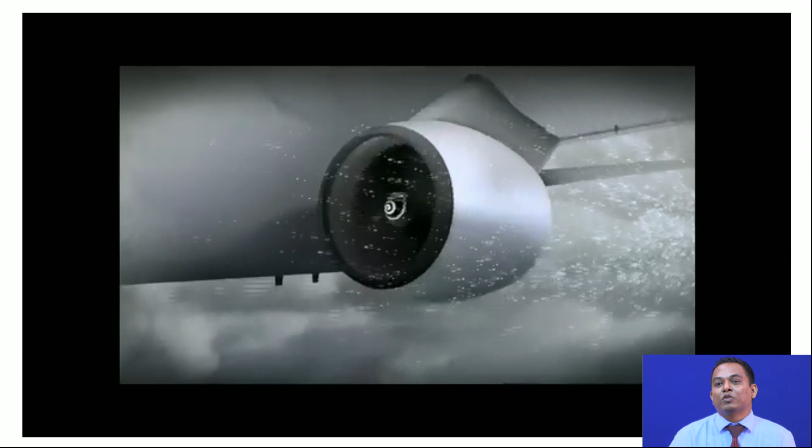No problem, let it stick up. After some time, what happens? The rise of temperature peels off those layers. Now that acts like a solid body ingestion inside your compressor. And what does it do? That causes your engine to surge. So there are so many engine failures because of that. So now people started talking in terms of this physics also.

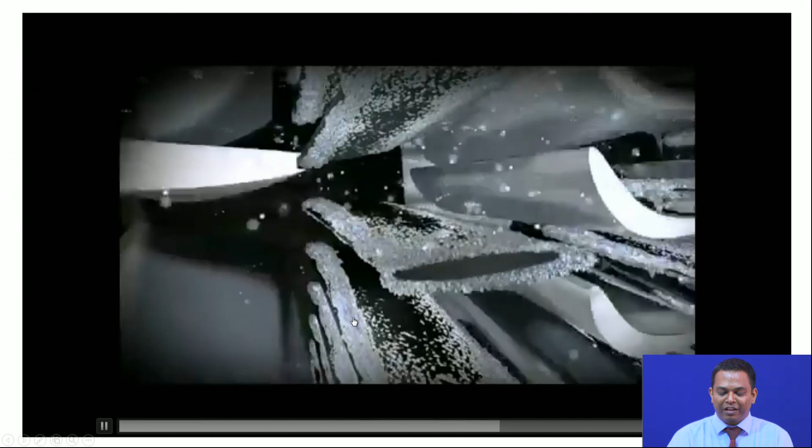This is also one kind of instability we need to understand. If you look carefully, here is what is happening: this is the strike, and after it peels up, it moves downside.

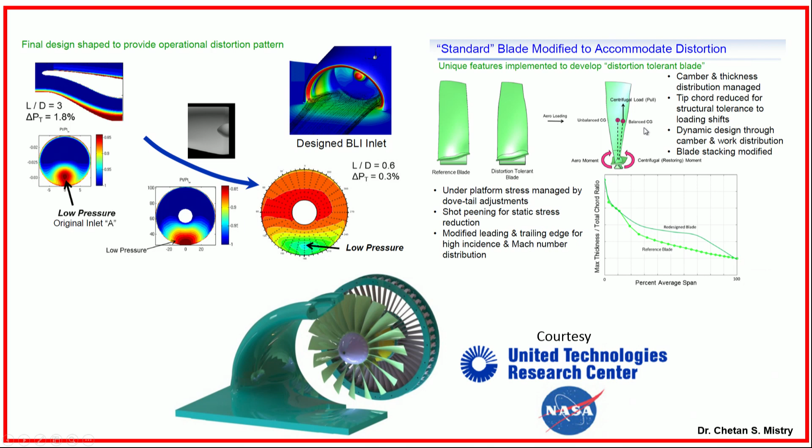So now they started talking in terms of designing the blade in a different concept, called distortion tolerant blades. The group from United Technologies and NASA, and even Rolls-Royce Cambridge, started working on this concept of boundary layer ingesting engines. Here is their reference blade; according to the requirement, they modified that blade. When modifying this blade, you need to care for loading and unloading, which is why they shifted their CG position, modified their thickness, and modified their incidence angle.